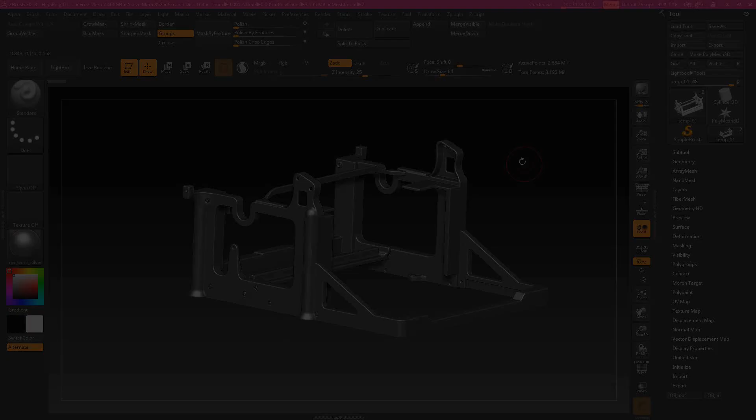We're continuing with our high poly here. I'm really happy with how this frame is looking. Everything's going really smoothly. Things are going to be going a lot quicker now.

We are getting stuff into ZBrush very quickly, just polishing it up. One thing I want to do moving forward is make a new layer here, and we'll call this ZBrush. The point of this is we can keep track of what we've already put into ZBrush.

So if I select this frame, we can add selected objects and just turn off the visibility, so we quickly know that we've already put this in.

We don't need to worry about it. We can also take these bolts and add them there as well, so we can just continue going through and quickly getting everything through.

I think the next thing that makes the most sense would be to get these feet in. With things like these, there's no point in keeping them separate—we're going to be treating them all the exact same. So I'm going to grab them all and combine the meshes. We can isolate these guys—very, very simple.

What I want to do with this is open up our UV editor, on the other screen for now. What I want to be checking essentially is the hard edges, which should be all pretty good.

We just have the hard edges on the top and the bottom, which is perfect. We can then select these faces, hit our tool that breaks up our UV shells based on hard edges. Everything's split up as it should be. Perfect—put this back off onto the other screen.

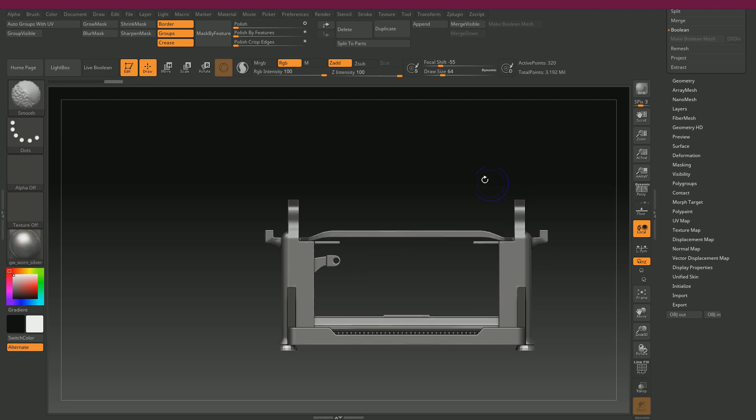I always just go with the star and OBJ in. Oh, my bad—I forgot to actually select the star and hit OBJ in. I was replacing the screws instead. So now we've got these guys.

Very simple. If we shift-F, we can auto-apply our groups so they're all different poly groups. Let's go ahead and Dynamesh this guy.

We can keep it consistent. I think everything we've Dynameshed so far was about 1,000, so if we Dynamesh this, our poly count per square centimeter will on average be the same as everything else.

So we have that now—the poly count is higher. I might want to crank that up a little bit, but we'll go along with it for now, and if we need more, we'll add more.

For this, just polish by features, crank that up, trying to round everything out like so. I feel like this one is— oh, it's just the perspective being a little funky. But yeah, that's pretty much exactly what I'm going for.

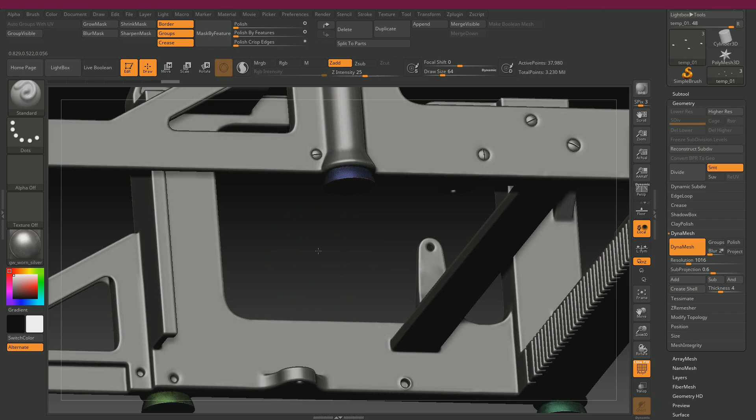And then we didn't get to do this last time, but we have our poly groups split up essentially for the top and the bottom. If I look at the bottom, it's a different poly group. We can use our masking to specifically target these sharp edges that we put into place.

We're going to do that by just having groups selected and masking by features. So it's masking by the groups, and our groups are separating along this edge here.

That's what we set up in our UV editor—I explained more about this in the previous parts. So then we can grow our mask, sharpen it a little bit to get it tighter, grow it again, and we have a nice mask around both sides.

If we control-click somewhere into the viewport, we can invert our mask, and from here we can just hit it with a standard polish.

And if I control-click and drag, I can get rid of our mask. And yeah, we just sort of softened out those feet there. Very simple. I might want to then just do a quick polish over the whole thing, like 25.

Yeah, and that's that part done really quickly. We can go back to Maya. As you can see, we're going to essentially be repeating a lot of the same stuff.

Very weird, that was acting strange.

I can now add this to the ZBrush layer, and we're just going to be taking away at everything here. There's going to be a couple weird exceptions where it's a bit more complex, for example preserving these kinds of shapes here, but we'll get to them when we get to them. We can get a lot done in a short amount of time doing it this way. We pretty much have our high poly like 85% done by the time we finish our last chapter.

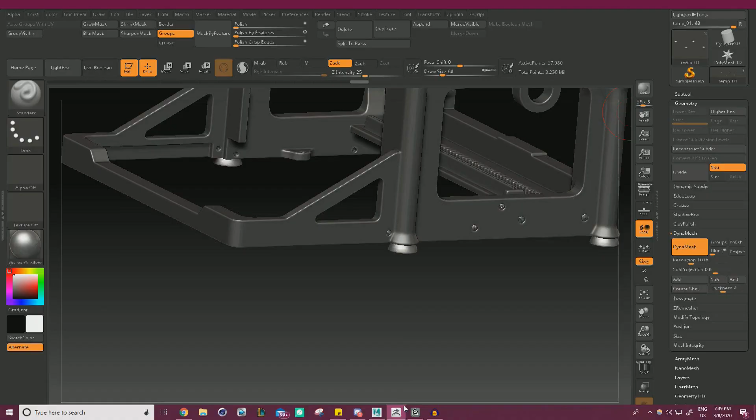Duplicate those guys, or you can append whatever you need to get an extra subtool in here, OBJ in on top of that. Now we have these bottom parts of the feet. We're going to do a very similar treatment on these guys, where we just auto group with UVs, Dynamesh.

Polish by features is going to get rid of those harsh chamfered edges, smoothing that part out but keeping this sharp edge, which is nice. We can then target that edge specifically with a mask by features, grow the mask a little. Mostly worried about the bottom here, actually this area, and we can just do a light polish. Sorry, we want to invert our mask first, then light polish.

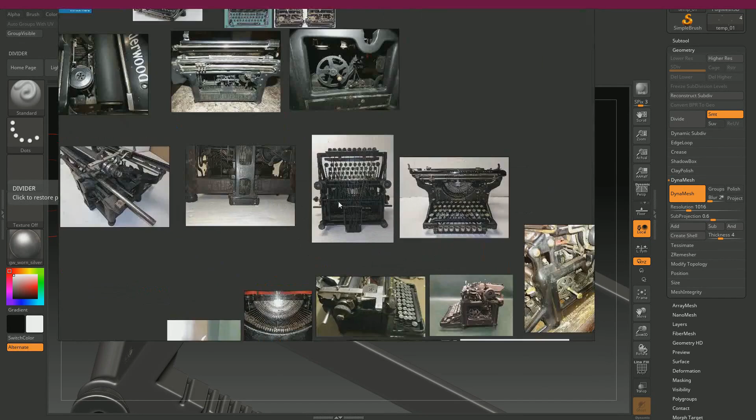Of course, I'm looking at reference on the other screen, so it's very important to try to get a sense for how hard these areas are. It's a pretty soft, or rather, not a very soft transition, it's still pretty harsh. Something along those lines, and then just a quick little polish all over.

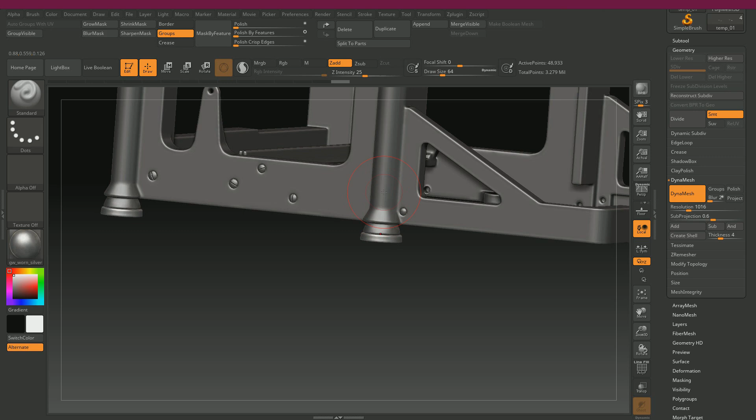Maybe not even that much, maybe like 5. It's really easy to overdo it with this stuff. But you can see now what I was explaining before. By having this and this be different parts, we get these nice seams in the middle where these parts are beveling into themselves, and we get these nice lines or panel lines, however you want to describe them, even though in the actual low poly we'll be keeping it all as one uniform mesh. It'll all be one piece. This is just a quick way to get those distinct different parts, because they look like they're 3 different components.

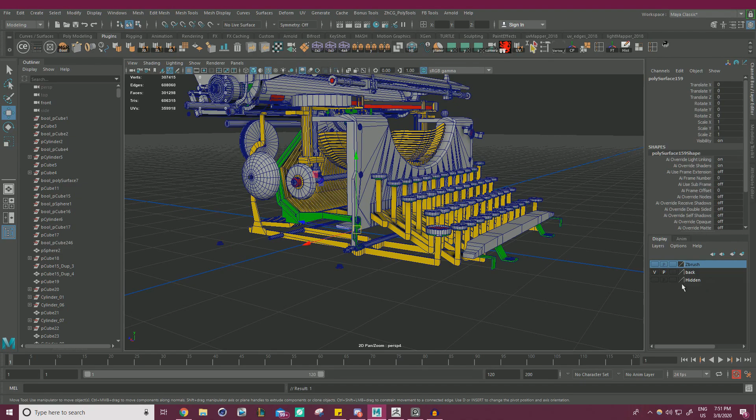Very nice. We can go back here, add these to our ZBrush layer. Now we have these guys. So this part, honestly, is going to be a little bit tedious, but once we get everything into ZBrush we can start adding custom damage. It'll be nice to see it all polished, and that'll get us our final high poly pretty quickly.

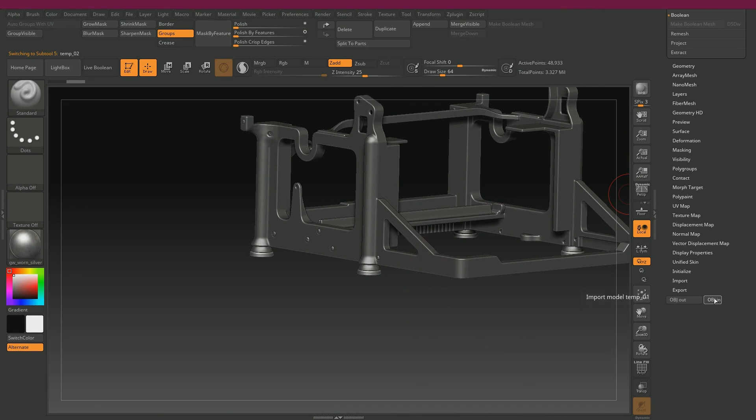I'm just combining these guys, and there's really no groups I need to separate with them, so I'm just going to send them straight off to ZBrush. I say that because there's no specific areas I'd want to target with these guys. If I import them, OBJ in, they're pretty much already doing their job pretty perfectly.

I can still do an auto groups with UV, and what I am going to be doing is, I feel like Dynameshing is going to make them a little too soft, so I'm just going to straight up divide and smooth, and then delete the lower, and it's looking really soft. It's doing its job really good.

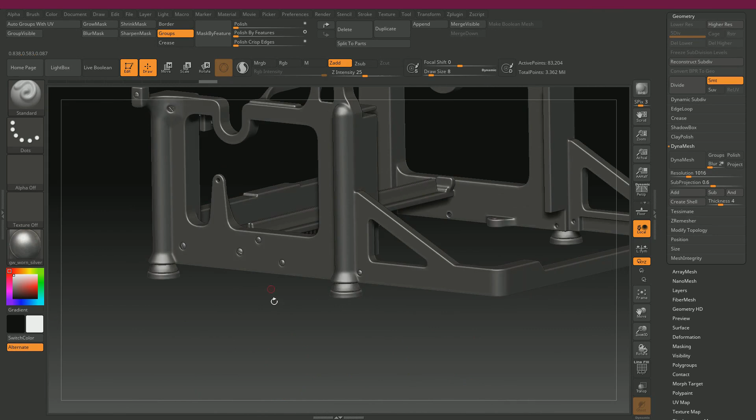I will point out though that this looks a little polygonal. We'll be doing another pass later where we chip away some damage at it. I'll soften it out then, because it does look a little low poly for a high poly.

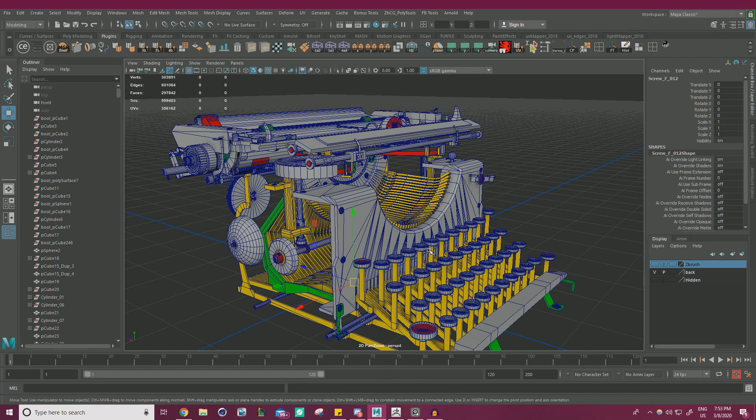Let's get back to Maya. These guys we can add to ZBrush. I don't want to bring all of these pieces into one ZBrush viewport at the same time, it's going to be way too much for everything to process at once. So let's just get the things that are attached to the main body directly, and then we'll have all the interior parts with the keys as a different scene, and all the top pieces as a different scene or something like that.

Let's focus on this front plate, it's a pretty important piece. This one might be a little bit more complex to get set up properly, just because of the nature of the shape, and some of these thin areas might be a problem. Anytime you have a super thin edge like this when you're polishing, it'll get a bit tricky. It'll probably make more sense when we actually import it, and I can explain it that way.

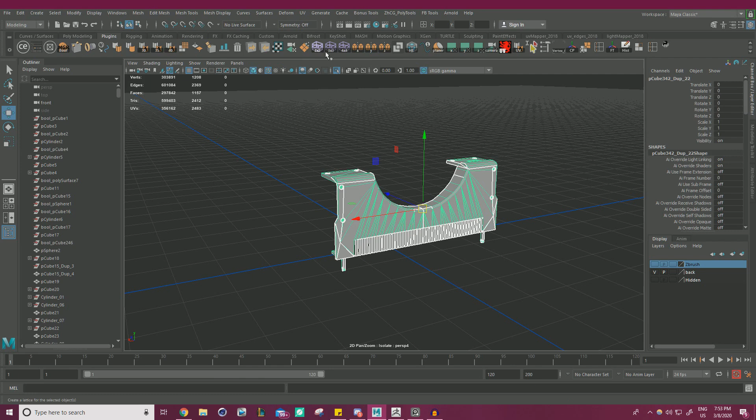So let's just do our standard check here, let's check out our hard edges. And I'm going to turn off this button here, which was just showing where our UV seams are, not very important right now because our UVs aren't set up properly anyways. Let's check our hard edges. We want these to be soft.

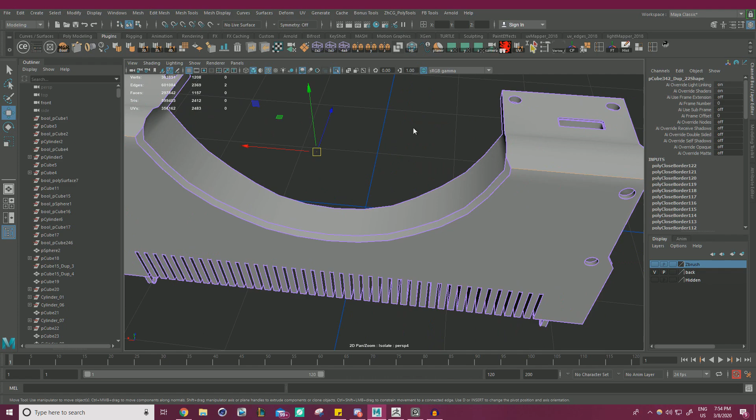Yeah, that's looking pretty much what we want anytime there's a 90-degree turn or anything like that.

Cool, let's go ahead and select all these faces for UV breakup by hard edge. We can send this guy off. Like I said, this one will probably be a little bit more complex, so we'll see how this goes.

Duplicate and obj in. So let's start off by auto groups with UVs.

And we're gonna have to dynamesh this. I'm gonna crank this up a little bit, probably closer to 2K. We're gonna need extra geo on this because there's a lot of thin parts, so it'll probably end up lagging everything for a second while it's processing. Dynameshing can be a little bit expensive on your computer to process, so let's just have it figure this out. And we'll see, maybe it's just like an absurd amount of geometry and I added way too much.

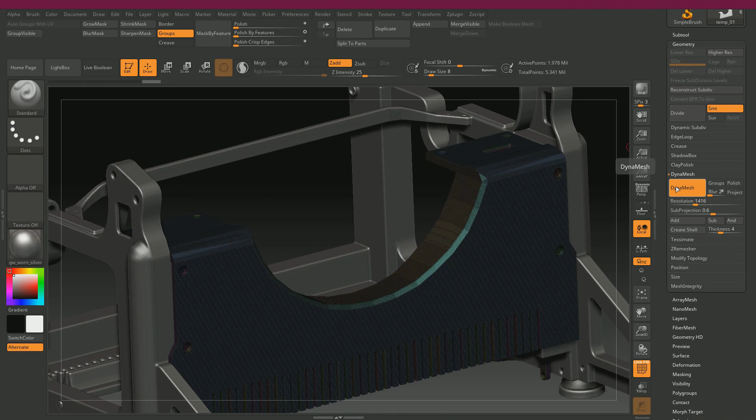It's very likely. Another thing to mention, yeah, 4 million is a bit much. You can already see it's lagging everything. So let's go somewhere in the middle, maybe like 1400. But you'll notice with ZBrush, when you start to add too much geo or you over predict your dynameshes, you're going to be crashing quite a bit. So I'd recommend saving pretty often.

Even this is starting to lag, so we're not going to have too many more things in this viewport specifically before we dive into a different one. And I'll explain what that means in a second when we get to it.

So let's focus on just this piece and we can turn off the view for everything else. I do that just by shift clicking on the eyeball for the piece that we're currently selected on. And if we're hovering over something, even if there's no eyeballs, we'll still be looking at it.

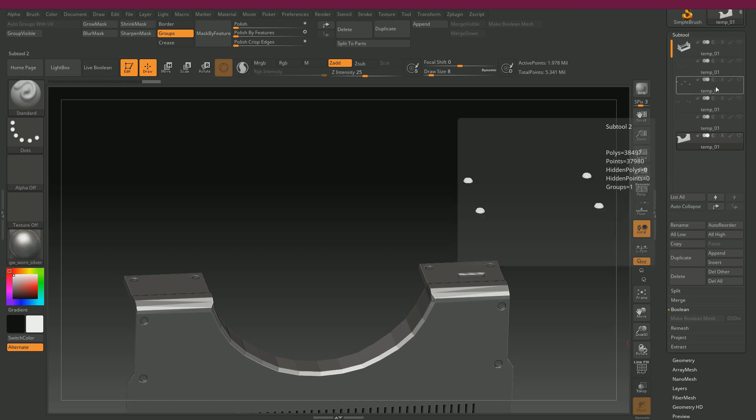Conversely, I do believe there is a button here that isolates just the one that you're looking at, but I think it might be in the newer version of ZBrush. I could be wrong. But anyways, let's work on this piece.

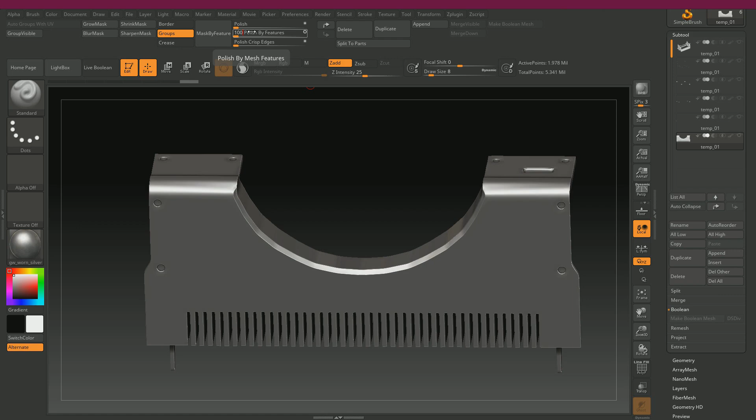Let's start by doing a polish by features. And you can see it's giving us some wonky results here, because ideally you should just be able to type in 100 and call it a day. For the most part it's good, but down here there's some issues.

So I'm going to mask out some areas like we did before in the last part. I'm going to mask out these screws, just so we don't have to deal with them shrinking in size too much.

This, of course, is just control clicking and drawing onto it. If any of this stuff is confusing, I did go over pretty much all of it in the last part, and I'll try to bring it up for the first few parts. But yeah, just control drawing with my left mouse button.

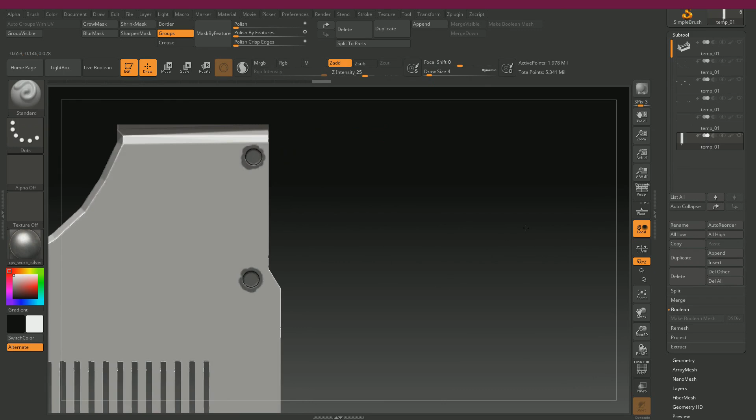I guess it goes through, but that's not the worst thing. These bottom parts I want to pretty much preserve completely, so I'm going to hold Control, click up here and go to this mask option and just select all of this stuff so I get the bolts and the rings and all that. And then hit Control and go back to Mask Pen and just draw out these areas as well.

So this is how I've been doing it for now. I'm actually watching a new tutorial right now myself on making handguns inside of Maya and ZBrush, and they're showing a similar but different workflow where they utilize a tool called creasing. And I think I will probably be doing that workflow moving forward, because it seems to be a little bit faster than this and it's a lot more precise.

This is relying on a lot of masking, a lot of going back and forth. So I'll experiment with both. This does get the job done though, so I'll be utilizing it for this tutorial.

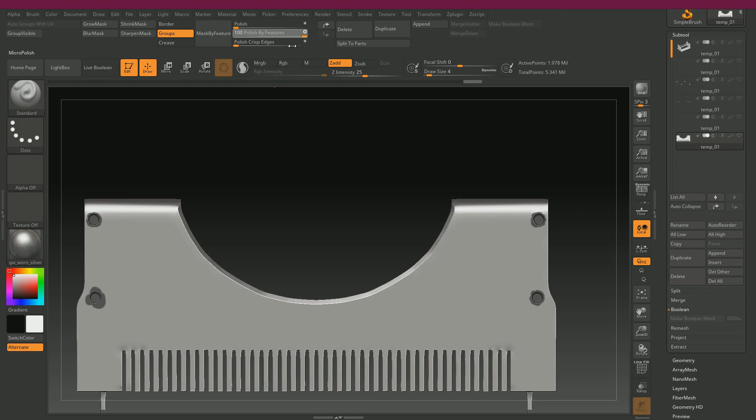But anyways, with those masked out, we can go to our polish by features, crank that up to 100. Just keep cranking it, I want this to be smooth. Just want to make sure it's not really messing anything else up.

This area is getting pinched a bit, but it will work itself out when we do our standard polish, which is nice. So I can invert our mask now and do a standard polish by features. I'm going to do it very lightly, because it's going to be pretty strong on this stuff, maybe even like 2. And that seems to be working on everything.

Let's once again invert our mask and go for a standard polish, something of like 6% maybe. And it's making some areas look good and some areas not so much. Maybe we could do more, 25.

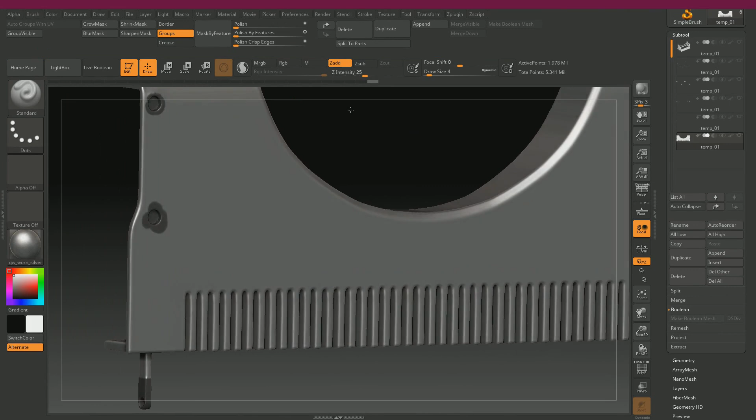I think we should get rid of the masks and just focus on a very light polish overall, like a 5. Or we could try a different type, like polish crisp edges. This version I think is a good one, like a 2%. Yeah, this is looking a little bit more desirable.

See what I'm talking about with this being super thin? This is passable because it's metal. I think it still gets the job done. This part not so much though, sadly.

What I might even just want to do for this is divide it. We're going to get a lot more geo, but it's going to be able to withstand polishes a little bit better. Same with this ring too.

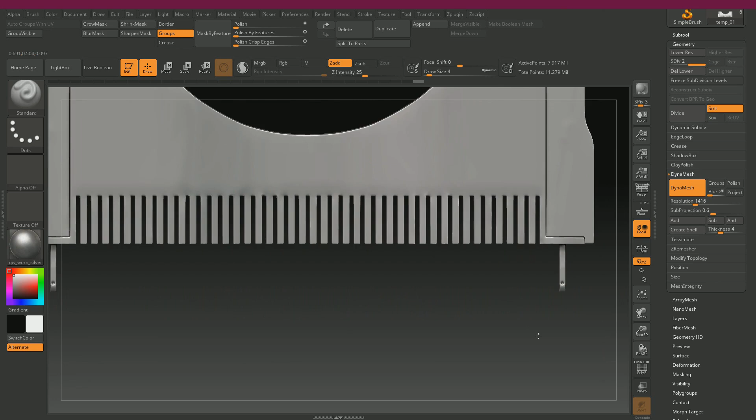But for now I'm just going to mask this out completely, because we do have to put a screw in here, and it's not a massive deal, but we just need to make sure that divot stays there.

But yeah, polish crisp edges seems to be doing it pretty good. Got a nice smooth transition over all these pieces. These areas are looking pretty crisp.

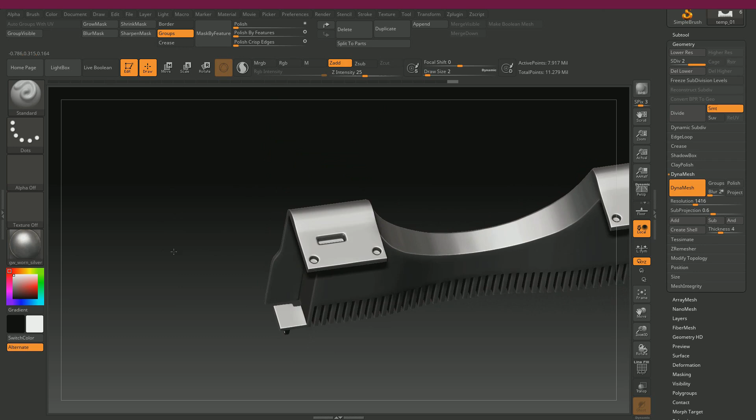Very nice here. We're still getting that smooth transition, which is good. My only issue is it kind of looks like these are divoting in a little bit. I might try to use brush.

So I'm pressing B to get my brushes to come up, and then pressing H for H polish. You could of course find it in here, or just hit H. H polish typically just flattens everything out. It is pretty strong, so I'm going to turn the intensity down to something like 1 even. And I'm just sort of buffing out these areas and smoothing it out by holding Shift, just to flatten it.

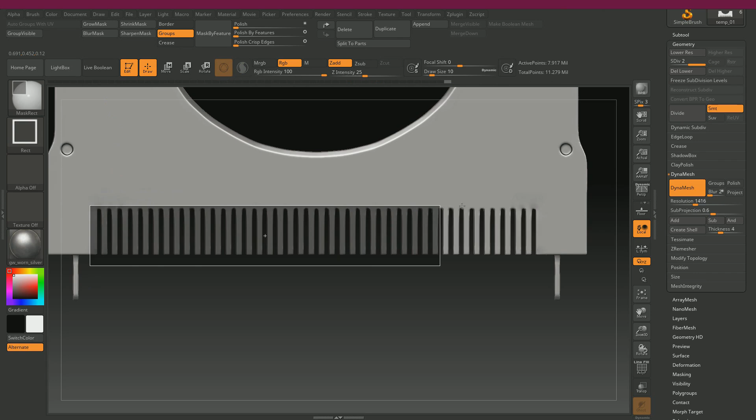I might even want to try masking just this area, and doing a polish by features to bring those hard edges back. Or maybe I should have just masked them from the very beginning.

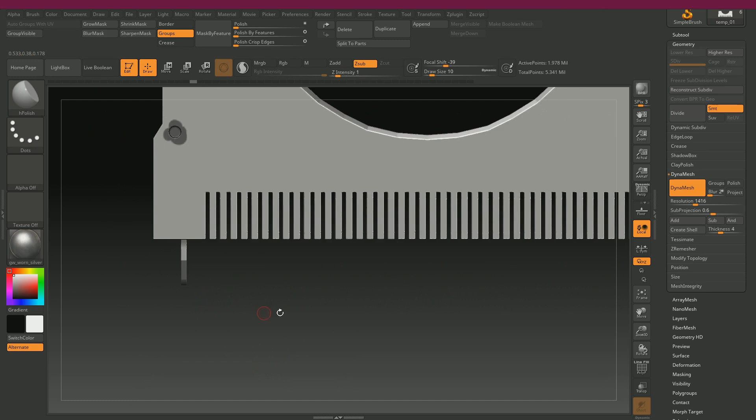Let's bring this guy back to the start by dragging this back. So this is where it's dynameshed. Essentially I'm just going to mask out these guys.

This is just returning back to when we masked everything out. Mask out this area as well. And then we'll do our polish by features to smooth everything out.

And it is pinching these areas a little bit, but I think we should be able to fix that pretty easily with our polishes. I'm mostly just concerned about these areas here.

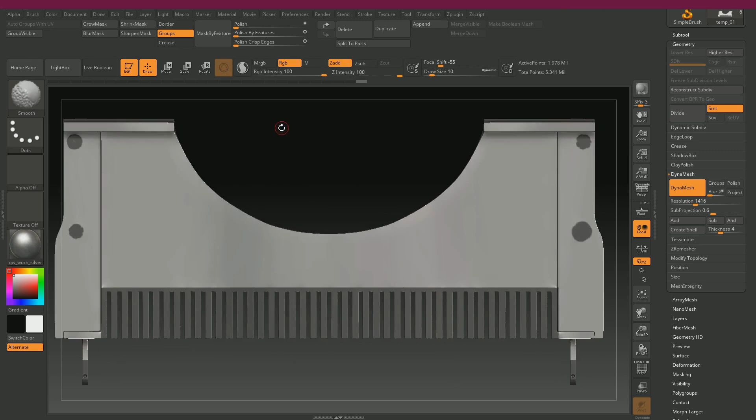So I'm just going to hit 100 a couple times, so everything else should be smooth, but it keeps these guys nice and sharp. Same with all these. Now we can go into these guys and give them a very subtle polish, like I believe we only did like 2 on these, just to sharpen it all up.

We can go for our polish now over everything, which once again was very, very light. But you can see it's giving us nicer results overall. These pinching areas though should probably be fixed up a little bit.

I'm just using the smooth brush to get rid of them, and then the polish will take care of the rest. I just don't want to nick the edges really.

But yeah, we can essentially divide this like we did before. Mask out these areas. I'm going to go back to the pen drawn. And I suppose I could use symmetry for this, but at this point I think this is the last time I'd have to anyways, so.

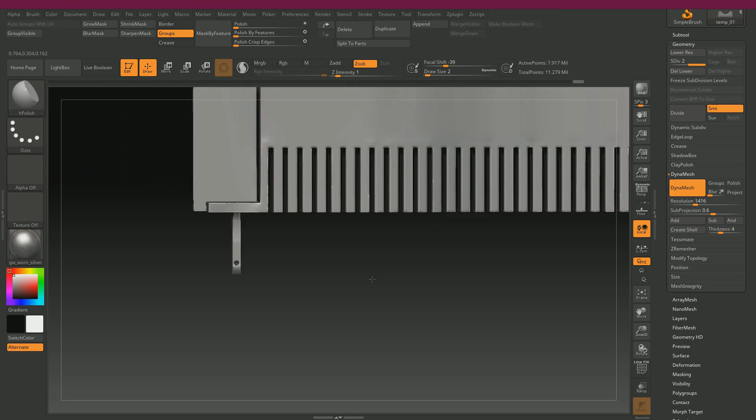We got those 2 guys masked out. We can just do a very light polish over everything.

Okay, that did very little. Let's try polish crisp edges. Yeah, that's definitely the better one for this example. Do it again, just messing with the values. You never want to just dive into it too harshly off the bat.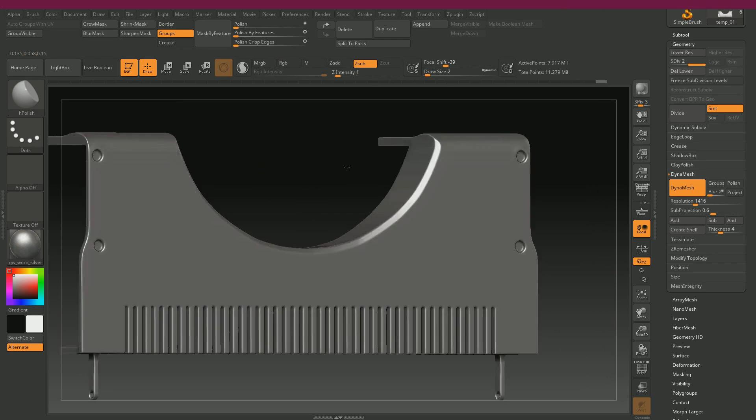But yeah, this is exactly how I want it to be looking right now. Very, very smooth, solid looking. The only problem areas might be these guys, but we can invert the mask and do a very subtle polish, maybe even just like 1.

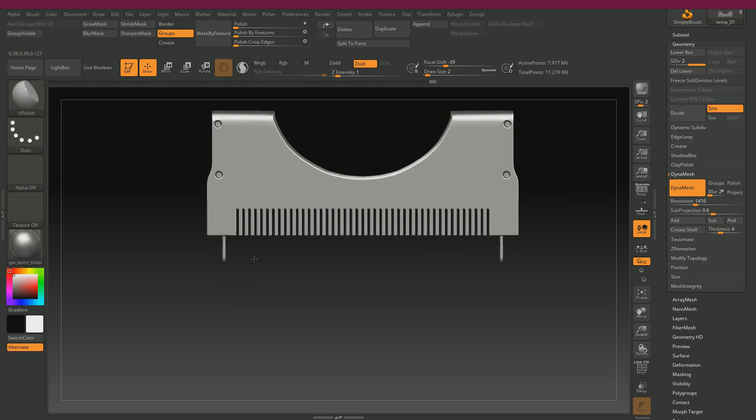I still think that ring's thick enough. There's a little bit of a wobble there, but I don't think it's ever going to be noticeable, especially if we shift-click the eyeball and bring everything back. You're not really noticing it, especially because this piece is blocking it off anyway. We do have to bring in the bolts for this guy, as well as the bolts for these guys, so let's go ahead and do that.

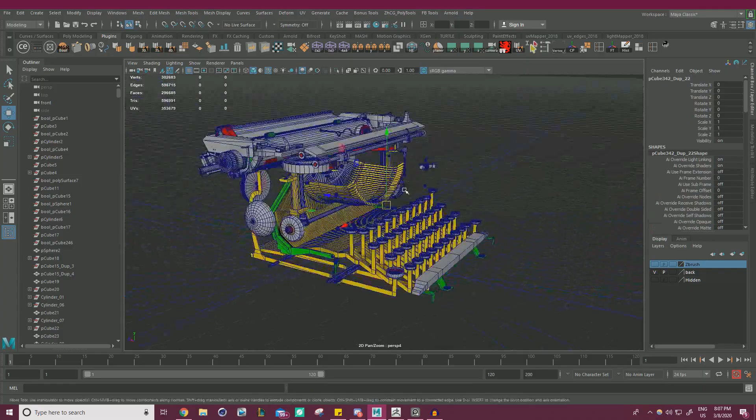Let's get rid of these hard edges, or the hard edge view. Add this to the ZBrush layer. Maybe I'll bring it back for now so I can easily find all these bolts.

I think these guys don't have cutouts, if I'm not mistaken. There's 1, 2... yep, that's something totally different. Okay.

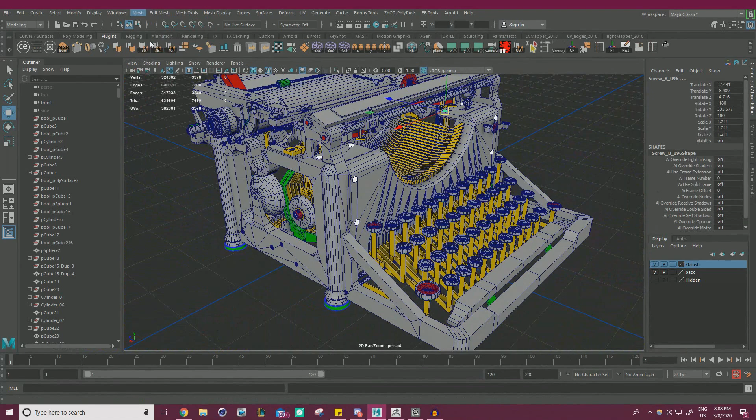So there's all of these guys here. Combine them. I can just, like the rest of the bolts, send them off, and I'll add those to the ZBrush layer. We'll duplicate this guy. OBJ in.

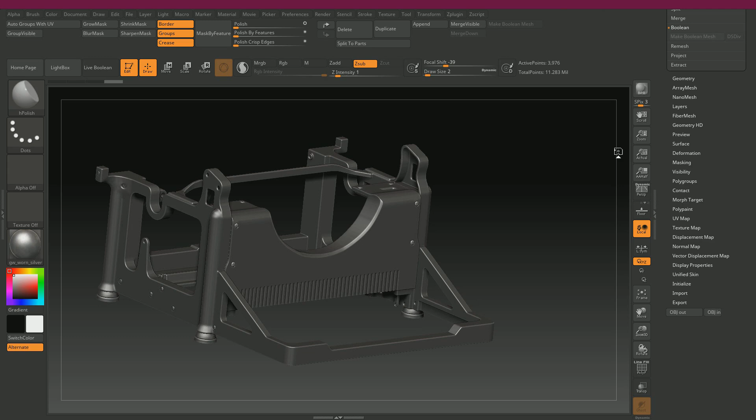Actually, it's just safer in general, and I think I'm going to do this moving forward - just appending a new piece and replacing that new appended piece with the object you're bringing in. It's just more consistent, because when you're replacing an existing piece with another model, it might still have the information of its previous translations, scaling, and rotation, and it'll pop up somewhere in the ZBrush scene where you can't even see it, and it gets kind of funky. So this is just more of a guarantee that it's going to pop up in the right place.

So let's just do our standard divide with smooth, and delete the lower so it's very soft, and polish them up a little bit.

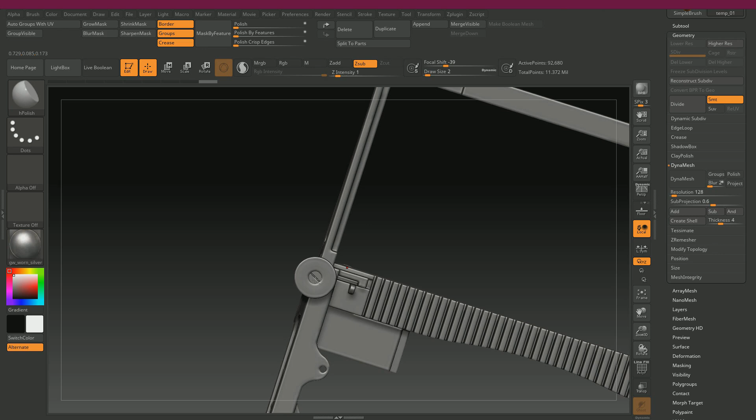Okay, that's good. That reminds me, we didn't polish the screws on the very bottom. So if you hold Alt and click on an object, it'll have that one selected, and we can just give this a very basic polish overall.

Maybe I want to do a polish crisp edges. Yeah, that's giving us proper results. When you're polishing, experiment with turning these on and off - they give different sort of styles of polish, and they're worth checking out for sure.

So I want to get these screws in now, these little dots. It's probably worth saving at this point because ZBrush has a bad tendency of crashing a lot, so I'm just going to go and do File, Save As, Highpoly_01, and make sure we have all of our progress.

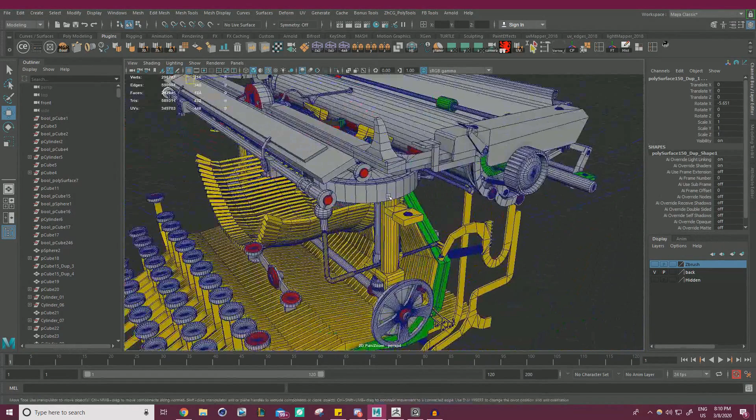And we can dive right back into here. So we said we were going to grab these guys. Like I said before, there's no point keeping them separate - these are all the same piece, so I might as well combine them and bring them all in at once, because I'm going to be treating them all the exact same - same polish, same damage pass. Yeah, it's all going to be the same.

So with these guys, check the hard edges - pretty much anywhere there's a 90-degree angle, which is perfect. We can split up our UV shells based on hard edges and ship these guys over into ZBrush. Let's just go in here and append a random shape. So we got those guys there.

This is one of those tasks when we're just sort of getting everything in and polishing them, where you can just shut your brain off a little bit and put on some good music.

Essentially, auto groups with UVs, Dynamesh this at like 1000. It looks pretty low poly, to be honest. If I hit Shift-F, yeah, it's looking a little low poly, so I might even just crank up the Dynamesh to 2000. And then from here we can just polish crisp edges.

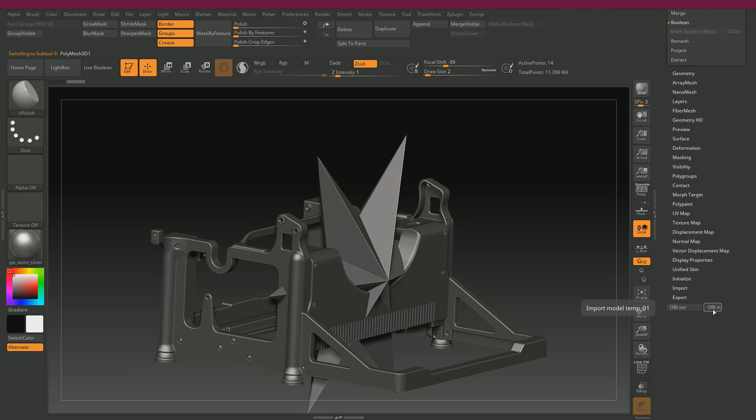And as I mentioned in the last part of this, as you can see, most of these shapes are very, very, very quick - it's mostly just the shell that's going to take a long time. OBJ in to get these guys in, like the rest of these parts are just going to be boom, boom, boom, boom.

Very quick to get inside of here. Auto groups with UVs, Dynamesh is probably going to need to be cranked up pretty high. And then just a standard H polish. Mask by features, grow, invert - very subtle standard polish.

I kind of want to keep those edges there, so I'm trying to find a different polish that does that. Polish crisp edges is definitely not it. This one's still giving it, but it's softening it out a little bit, which I kind of like.

Polish at 1 softens it out too much. I guess I could divide it to give it more geo, and the polish would be lighter. Yeah, something like that. It's pretty spot on to the reference that I'm seeing, at least.

So that's that. I would probably consider this all to be like one solid piece where all these things are working together pretty well. And the beauty of this workflow is, say I messed something up in one area, I can just import one of these pieces. It's not like I'm affecting everything at once. The more separated things are, the easier it is to sort of quarantine a bad mesh or an area that's in need of fixing.

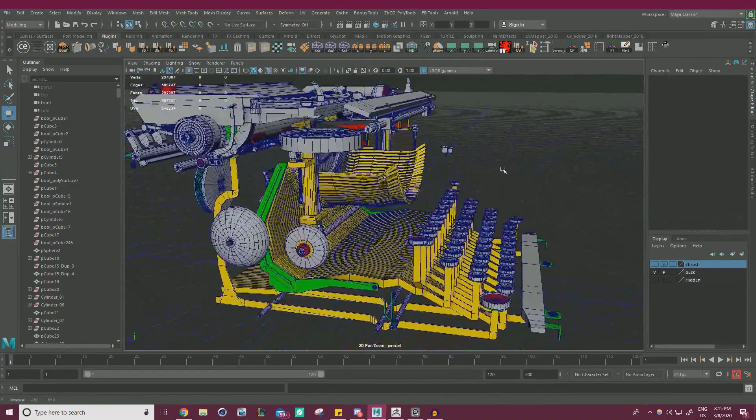So yeah, that's the main part. I might actually include these two pieces because they're technically attached to the frame, and then that'll probably do it for those. Then we'll have to dive into a separate mini scene within ZBrush, and we'll probably do the back or something.

So yeah, let's grab these guys. This one should be pretty standard. If we look at our hard edges, it'll probably be just the stuff which we'd want to polish. I'm wondering if this is round enough, but it should be.

Just in case, I can grab all these edges and even all these ones and just bevel them. Do something like that. Merge the verts, and I just want to make sure that these are their own thing, just so it's all softer around the edges, so it's easier to get that smooth look from the inside especially.

So if we check our hard edges now, we don't want this to be hard. We can probably just do an auto smooth and it'll figure it out. Yep, hard. I believe we wanted this face to be hard as well, so we'll harden that.

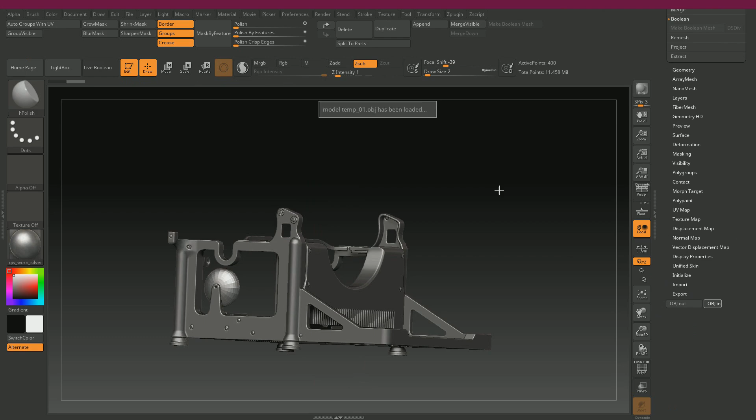Bring in a mesh to append and replace with our new one. So auto groups, and just get some crazy amount of geo on this guy. Dynamesh him at like 1500. 100,000 polys is pretty small for ZBrush, to be honest, so I'm going to divide him and delete the lower. That's an appropriate amount of geo for something so round.

And then we can just polish by features. I'm going to have to do this quite a few times. I'm just going to keep typing in 100. And I'm just going to isolate it. Yeah, that's pretty much the exact shape I'm going for.

Let's go ahead and mask by features on these groups. Grow, sharpen, grow, grow. Get a pretty solid selection there. We can invert the mask and we can start polishing it up.

Keeping an eye on the reference, of course. We don't really have a good image of the inside of this thing. There might be just a couple shots from the back that show it off. Could have sworn we had some shots looking through the back. Yeah, it's looking pretty...

It's not like sharp to the touch, it's somewhat softened like this. I'm just going to polish it without any masks on to even everything out, and I think that'll probably do it for this piece. Can bring everything back into view.

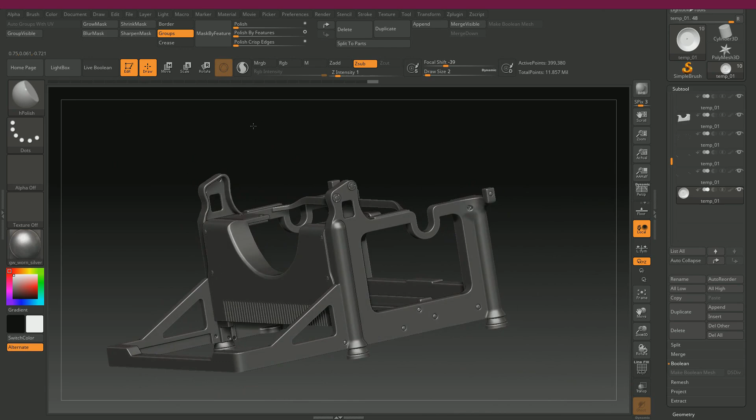Yeah, it's not looking like you're gonna cut your finger running it along it or anything like that. Okay, and then we did have a little peg going through it. These guys.

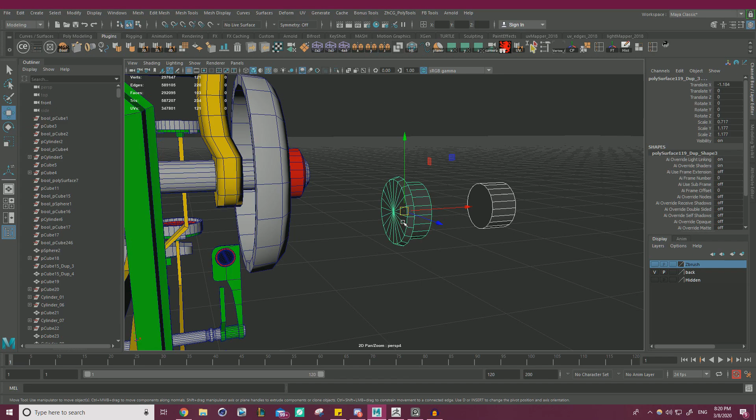I'm surprised I made these two different meshes. I'm actually just going to combine them here. Mesh combined.

I kind of feel like they should have been anyway, so I'm just going to snap this up here. Delete the inside face, delete this inside face, and then just bridge it all across. Of course it's going to do the twist. Once again, to fix that, you just bridge one edge, and then when you bridge everything else, it'll have more confidence in how it's bridging.

Yeah, I believe with a piece like this, we're going to bake down the entire thing, so I don't really care about the geo all that much.

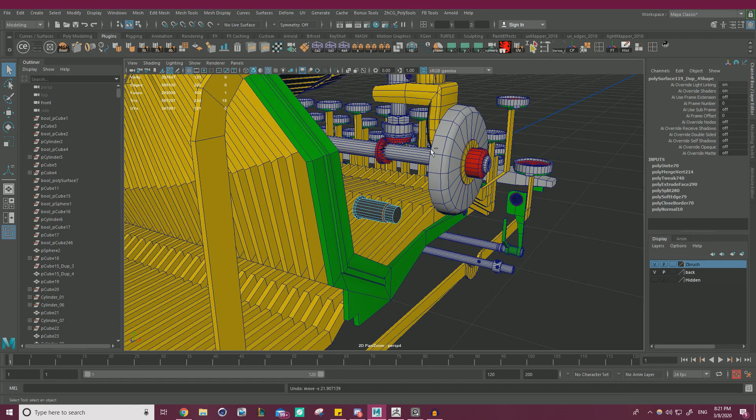Actually, if we were to bake it, we'd want to bake them in separate pieces. So I see why I set it up this way now. Let me separate this and explain: we'd want to bake this guy with this mesh all in one, because it's only visible from this view, so it would be baked onto this guy, and we'd want these in their own groups. Then we'd also want this baked only onto this other guy, in its own group. We'd want to keep these separate so we don't get weird artifacting in between. So that's why they're separated into their own groups.

It is a little silly bringing these in separately though, so I'm still going to combine them because I'm going to keep them together and treat them the exact same way. But when we're actually done with them, I'm going to separate them into different meshes.

So let's go ahead and check our hard edges. Set up very good. We can split them up and send this over to ZBrush. All right, we'll bring in a shape. And there we go, we have a nice plug for that bell shape.

We probably don't have to do really anything to it. I'm still going to dynamesh it, pretty much maxing that out, softening the edges a little bit, and then just a very light polish to give it that high poly look.

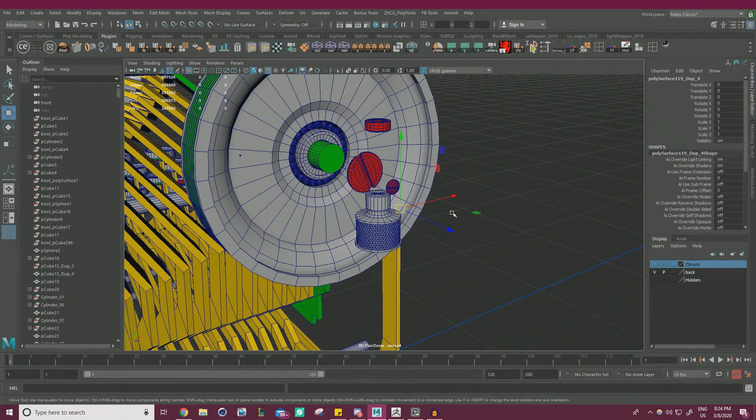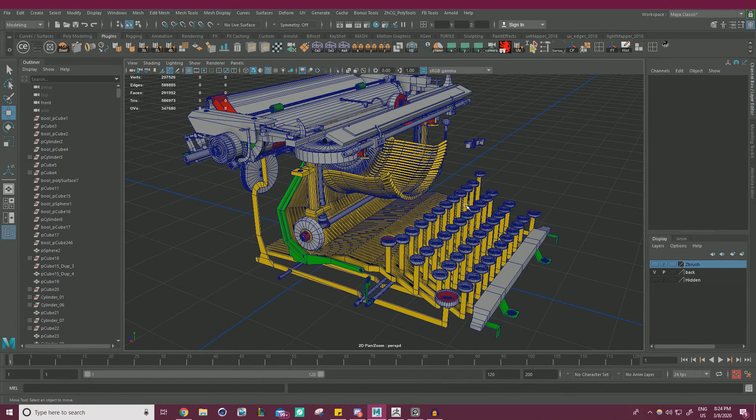I suppose all of these pieces are technically part of the frame as well, since they're directly attached, very similar to how that bell was. So I think these will be the last pieces I'll attach to the frame. There's obviously a strong argument that everything is attached to the frame, and an even stronger argument for pieces like this in the back. But I think these ruler pieces on top will all get their own group, and the interior guts will get a separate spot in ZBrush.

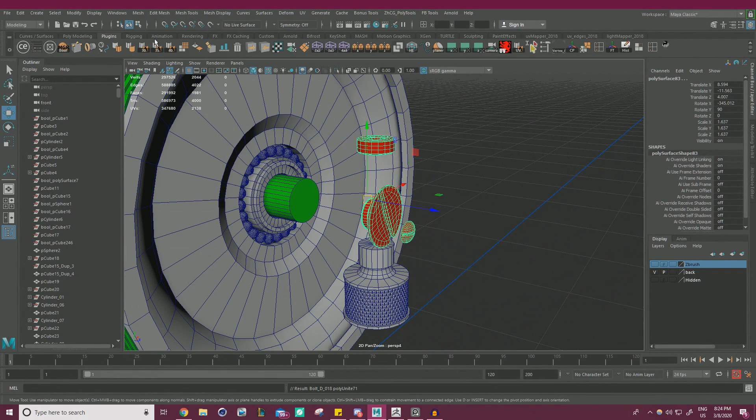I don't know if I'll get to that in this part specifically. Maybe each thing will get its own video, who knows. I might even attach this to the front. Yeah, I think we could probably attach all these guys in, and that'll probably be a good place to end for this specific video. We can attach these three bolts because they're all doing the same thing, all attached to the same piece, all going into this guy.

So we can export them and go into ZBrush, get our camera in there. Let's append a random shape, and of course replace it with those screws. We can auto-group some, just for fun—it's just a habit at this point, honestly—and then crank the Dynamesh on them.

And then let's give them all a polish. We might have to divide it a little bit to give it more geo. I'm noticing this guy is a little sensitive to everything, and I want to polish by features, because this guy doesn't seem fully round.

One solution to that is just masking, so I could mask out this guy and have him be the only selection, and then just polish by features.

Damn, I guess we really do need more geo on these guys. That should definitely be more than enough. Yeah, crank up the polish by features.

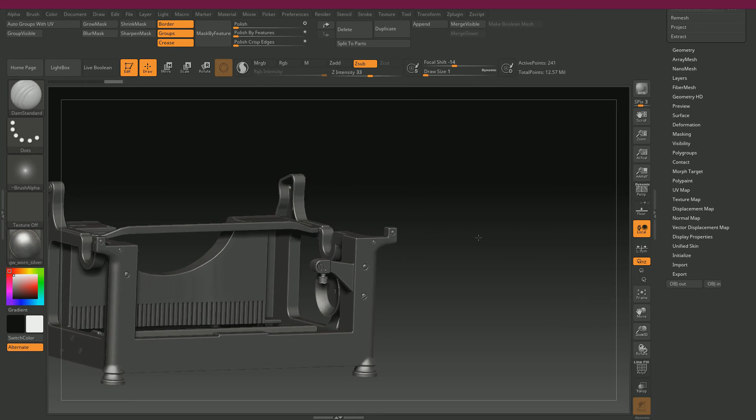ZBrush is starting to take its time loading things. We got this shape now that we can import this onto. And let's zoom in, let's get a good look at this guy. Can auto groups with UVs, geometry.

We're going to crank up the Dynamesh on this guy and then divide it. Going to be polishing by features to smooth it out. We're getting some wonkiness here.

It's because the edges are so thin. This is why I don't like thin edges on this stuff. The reason I'm going to go forward with it is because I think a polish will fix it. I guess not. I'm going to go back to when it's less geo and run a polish by features to smooth it all out. Now if we polish it, yeah, it'll soften it out.

I kind of want this to stay a hard edge though, so I'm going to mask out this area, but polish the rest. And then give it a little polish, like a polish of 1.

Okay, so that's that guy there. I like having these smooth transitions in and out because now it's sort of welcoming this pattern here. So if I grab this pattern, and yes, it is capped off, but when we bake it down, it won't really matter. We're not going to be seeing any of that information. It's all going to be hidden away.

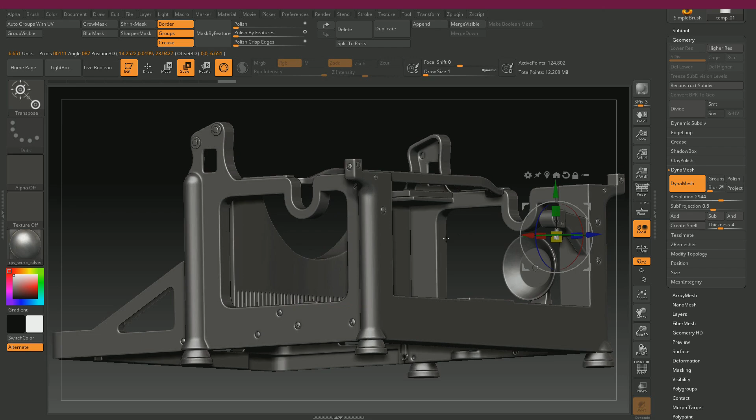I also want to scale this in a little bit. Let's go to our scale tool. Zoom out. If we hit this, it's going to go to unmasked center of mesh, so it's going to center on that. That's something I actually just picked up today, so that's really useful.

So our gizmo is going to be in the middle, and we can just shrink it down a little bit so we don't have those grippy bits sort of sticking into the geo. I like it like this a bit more because it looks more intentional.

So we got that guy in there. Go and hit edit twice again, so we're back into our normal mode. What's next?

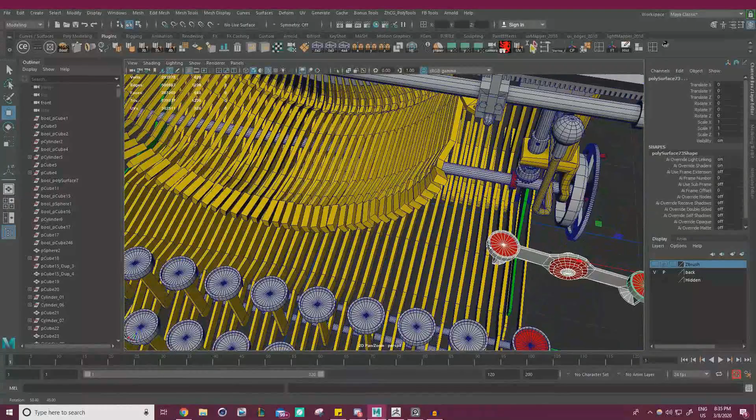We're almost at the end of this part. Once we get this guy done, I suppose we could include this. We'll see. I'm not gonna literally lose sleep over it.

I need to do some more stuff before bed, and it's getting late. It's freaking daylight savings time today. I lost an hour. So yeah, anyways, a little rant out of the way.

Let's grab this guy. This is literally just a cylinder. It's about as simple as it gets. The hard edges should already be set up, which they are. Send this over. This one should be a no-brainer.

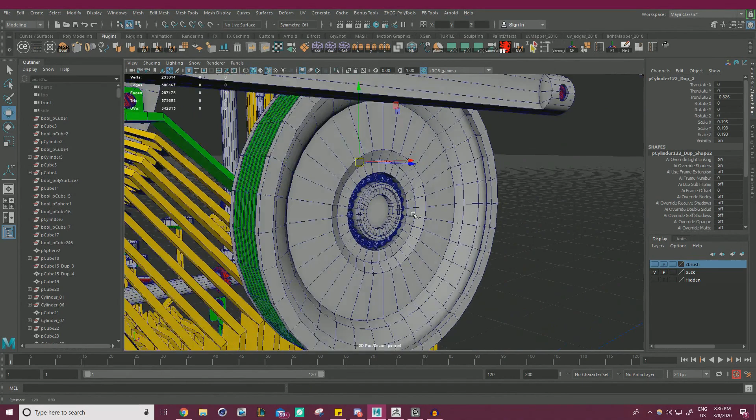Subtool. Okay, we got that guy in. Auto groups with UV, geometry, Dynamesh. And a little subtle polish to get the edges softer. I don't know if you'll ever see those edges. Also, that hole's a lot bigger. We'll see if that's going to be an issue with everything else. It honestly might be. So we'll have to see about that.

This is a bearing that we put together. I'm just starting to think about that now. I'm thinking that might be a bit of an issue, but we'll see. Let's just get this bearing in there first. Break up those UV shells. Send it off.

So we should be able to tell if it's a problem right here. OBJ in. I mean, you really just cannot tell at all. Let's auto group with UVs and give this guy the polish treatment. Start by Dynameshing. Dynamesh is not doing wonders for this one. We'll crank out Dynamesh to max.

Polish by features, and then a standard polish. Something like that, it's looking pretty good. And this is poking through, but that's totally fine.

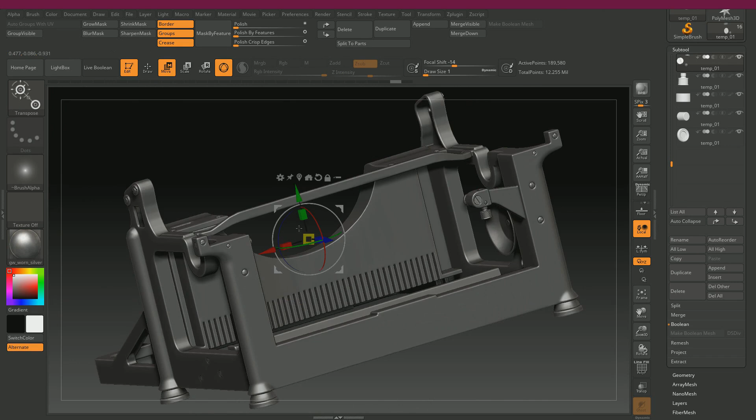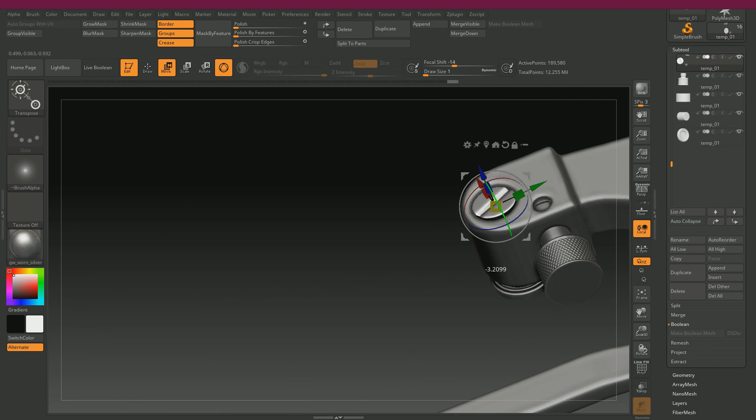Go back to edit, and I want to do something similar with this bolt. Let's get the move tool on there, and we can just sort of push him in there a little bit more, scale him up. Maybe scaling up isn't the right answer. His rotation seems to be a little funky. That seems to do the trick.

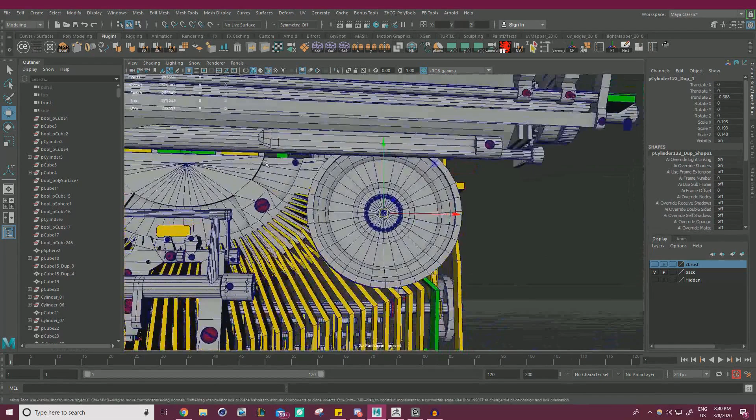So we got that all in there. Okay, these are all separate parts if I remember correctly, which is good. This is actually a really good example of something. As you can see, these are incredibly small shapes, and they're all touching each other, or very close to touching each other. If we were to bring this directly into ZBrush and Dynamesh it, what would happen exactly is it would say, oh, these are close, they're similar in shape, and it would morph them all together. We obviously don't want that, so what I'm going to be doing is essentially separating every other one and bringing them in two batches, then combining them inside of ZBrush after they've been smoothed out.

So shift right click, extract faces, and then we can just sort of do a combine on these guys. We have two different groups. Let's export this first group.

This is such a tiny detail. It is a little bit silly to even be going this far into detail, but that's the whole point of the tutorial, I suppose. If anyone notices this detail, I'd be surprised. But it makes things a little bit more realistic and fun.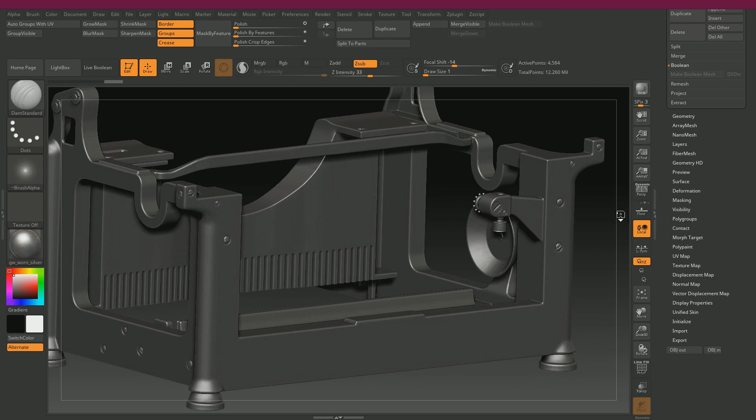So we'll auto group, Dynamesh at max on these guys because they're so small. I might even divide them and smooth them just to get them to be soft. That's pretty much it, and just delete the lower. We don't really have to do any polishing. That's kind of it on these guys.

I don't remember which group we brought in. We brought in the one where there's none in the middle. So now we will hide these ones and we'll bring in these guys. Exact same scenario where we duplicate, obj in, and now there's no risk of them sort of melting together. Divide, delete lower. Right, and that's that. Got those little bearings in there.

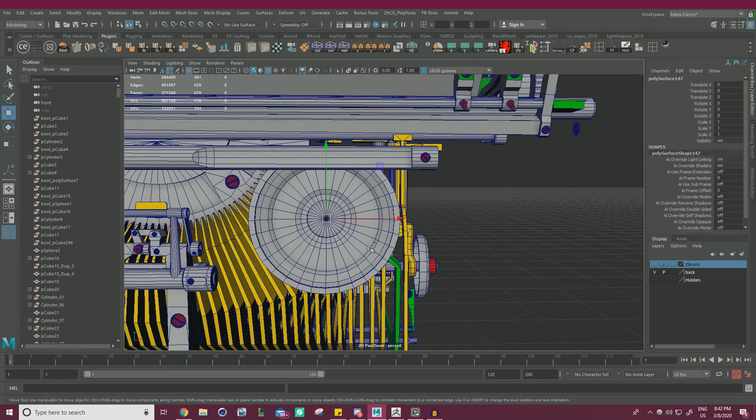Then we got 1, 2, 3, 4, 5 more pieces, and then we'll probably call it a part. And that's also a very natural place to end because minus this guy, it's the whole chunk. We can do that one in the next one. It'll be quick. But we're essentially blazing through this stuff. We're going to have to do a little bit more work on some of these areas at the very start where we didn't set them up completely properly.

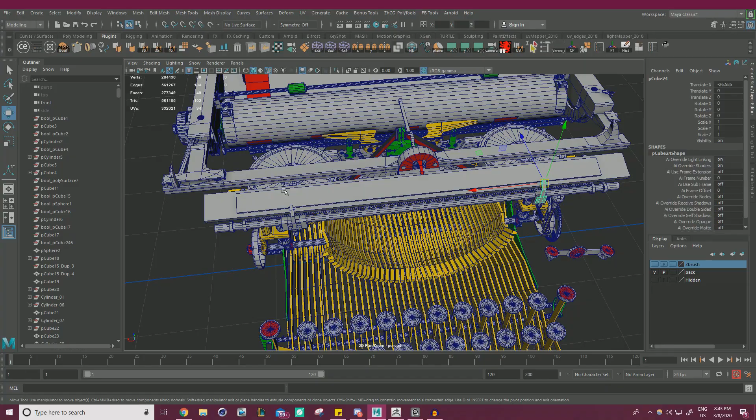And some areas like the ruler might need a little bit more love. I'm not sure if I'm going to be sculpting in the ruler details in ZBrush or if I'll be doing them in Painter. Painter's sounding a bit more appealing right now. But we'll see. Anyways, let's just get this part done.

Okay, hard edges are pretty much all where they should be. Mine is here, and here, so just softening those out. You can go ahead and split those up into our UV shells.

Send this boy off to be with his brethren in ZBrush. OBJ in, get this guy in here. Auto groups, geometry. We are not going to dynamesh this guy at max. Let's try something like 800 first, which is obviously too low. We can do a little bit higher. 1700 maybe could be a good one.

If we try to polish by features—oh, gotta turn it on to the right setting. Yeah, that's looking about right. And then we can mask by features groups, grow the mask to be a bit more bold and wider, and polish these areas that we targeted pretty aggressively.

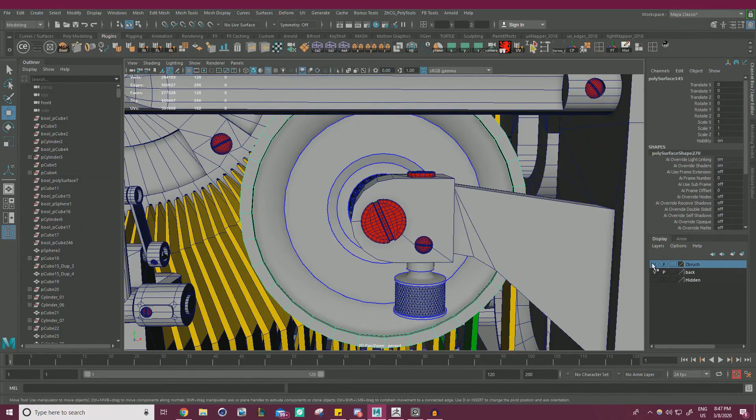Let's grab this ring. Is this just a ring on its own? I guess I set it up that way. I can see why, just for separation reasons, which is kind of interesting. In hindsight, I probably should have just made it all the same.

Let's auto-smooth this and see these hard edges. Okay, have the UV shell split up along the hard edges. Send this off, go into ZBrush.

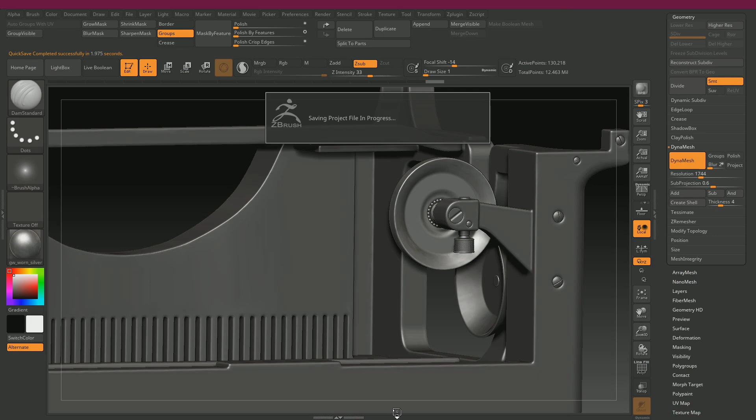Subtool, duplicate, OBJ in. Shift F, auto groups, geometry. Dynamesh it—this should be fine because it's a pretty simple one.

We're just going to polish by features a bunch of times, get it really nice and round, and then just a standard polish on the edge. Very subtle, but nice, and we get a cool panel line in there.

There's a little bit of a gap now though, so I'm going to have to move this in a little bit. So I'm going to go to the move option, alt click it there, just center it.

Reset mesh orientation, mesh to axis. I wonder if there's a way to get the orientation of this guy back to normal. Mesh to axis—nope. Reset mesh to orientation—nope.

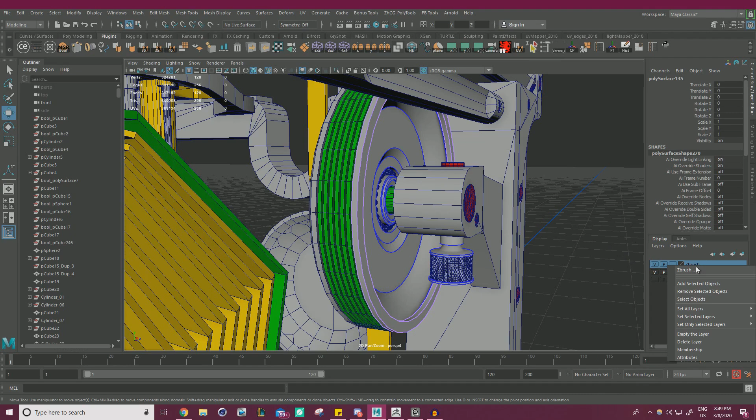Send this guy off to the shadow realm. Okay, three pieces to go. This one we sort of had as a bunch of little bands. This might be a weird one to do, honestly.

I'm tempted to grab all these edges and just straight up bevel them, because I feel like it'll be easier to go about things that way. I feel like if I try and rely on a polish to soften this out, we're going to lose these sort of strips here in between everything. So I'm just going to straight up bevel everything out.

So in order to do so, I obviously have to select every edge, or edge loop here rather. Just hit Control B, softens everything out. I'm not going to worry about the hard edges on this, I'm just going to be sending this guy out.

Subtool, we can append a random shape. One of the things I should really do is actually get the new version of ZBrush, because it comes with groups, and that sounds like a blessing right about now. OBJ in, to be able to organize everything into little groups here with folders. But anyways, we have this in.

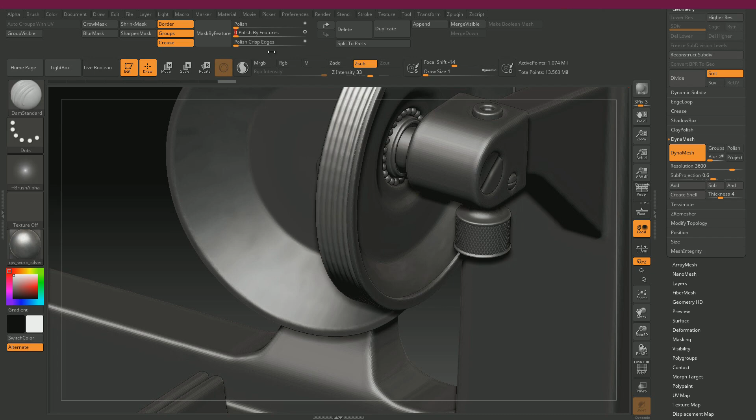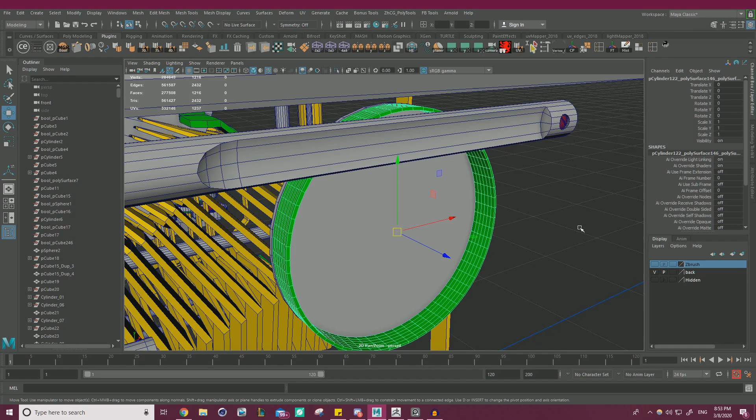I think that's fine, honestly. Then I polish the whole thing. I just wanted that kind of banding look more than anything. Can send that to ZBrush.

Just these two guys left. Hard edges on this one should be pretty much exactly what you'd expect. So let's get those UV shells in order. Send it off, and bring that in.

Actually, I feel like I should save. I'm going to go to File, Save As, and just save over this. It's been a while, and I would really hate for everything to crash right now. But yeah, we can auto group geometry.

Dynamesh, I like 1600. Maybe more, because most of the geometry is just this big open face. Maybe closer to 2000.

Polish by features. It's completely destroying the front, but that's not the most horrible thing, because it's really easy to mask this area out. Just make my brush bigger. And it's just flat, so it really doesn't matter if we're masking it out.

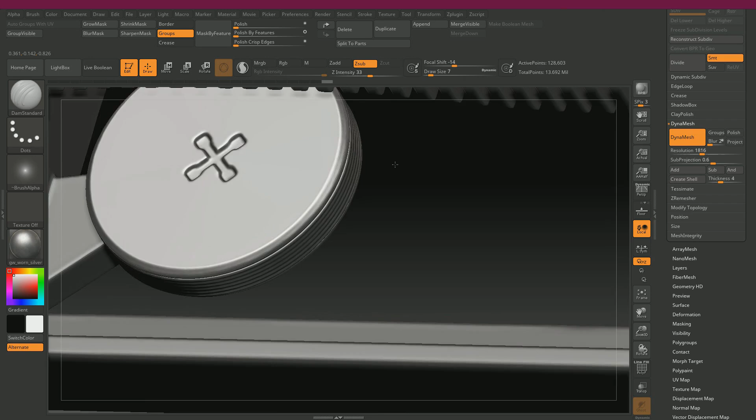Okay, we just got to add the screws, and that'll do it for this part. Once again, they're all one part, really easy to work with.

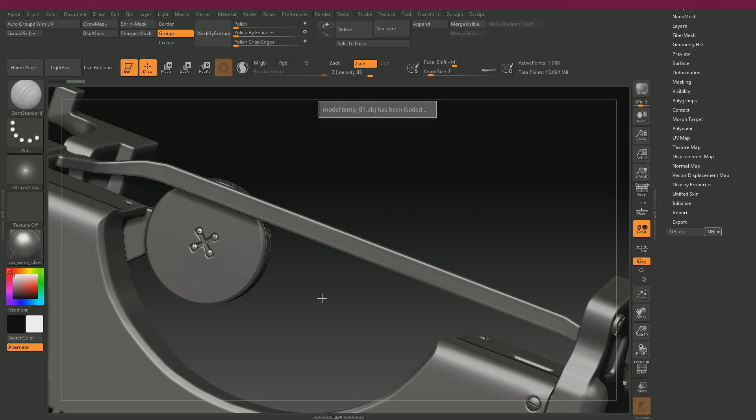Just sort of duplicate, OBJ in. And this is pretty much going to be it.

We're not even dynameshing, we're just dividing a couple of times, deleting the lower layers, and polishing, softening those guys out. Yeah, that'll do it. That'll probably do it for this part.

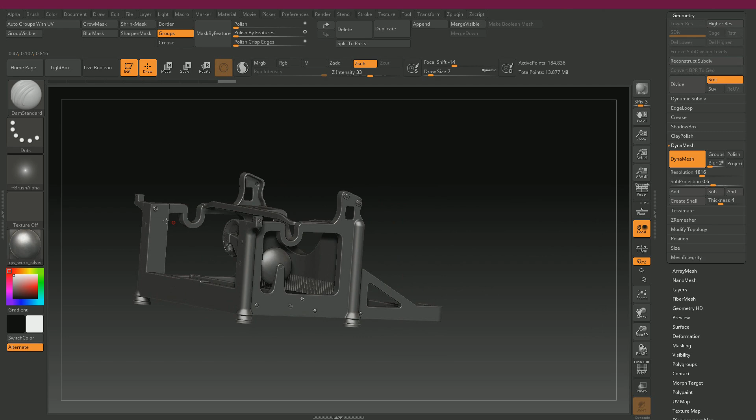This is pretty much like the main frame and everything that's attached to it. There is that one little thing on the front, and I might want to get this bar that's sticking through here, but we can do that at the very start of the next part.

We got quite a bit done here. Moving forward, until we get everything inside of ZBrush and everything sort of polished up and ready to add damage to, I think each part is probably going to be a little bit longer. If I were to wager, yeah, well, I guess this isn't that much longer than a standard part.

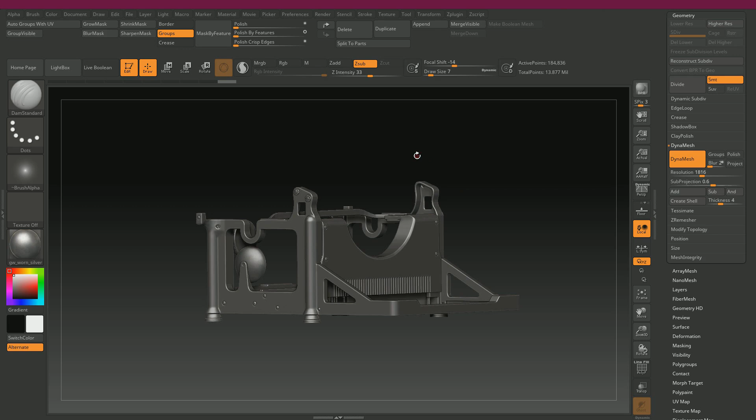So I want to wrap this up now just because it's getting late. Let's go ahead and save this. It's going to not want me to close it, but I'm going to hit no anyways because it's asking me to save something different. But yeah, moving forward, these will probably be a little bit longer.

Let's get these two guys into our ZBrush file. All we have to do is do a polish pass on these guys, add some damage, which is always super, super fun. And that is the Highpoly done. Like I said, way faster now that we got the whole blockout done. That's why I sort of like this workflow.